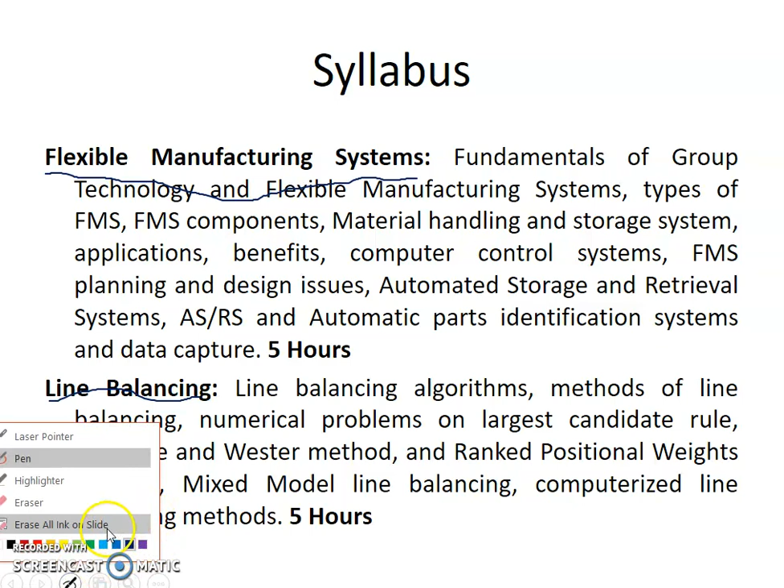So here, before going to understand what is flexible manufacturing system, we need to understand what is group technology. We can shortly call this as GT. Here we have a definition for group technology. Group technology or GT is a manufacturing technique in which parts having similarities in geometry, manufacturing process, and functions are manufactured in one location using a small number of machines or processes. That is called the group technology.

So here what this definition tells is that whatever the parts which are having similarities in design, manufacturing, geometry and functions, all these we are going to group into one group of parts which are similar, and we are going to manufacture in one location by using a small number of machines. That is called the group technology.

For example, if you go to any shop floor or manufacturing industry, we'll be having many number of machines, and the parts we are going to process by using different machines based on different processes. For example, you need to do a turning process, and again we need to do some drilling, milling. So like this, many processes will be done on the parts. So these parts we have to take to different locations where the machines are there in the shop floor, and we have to do the manufacturing processes.

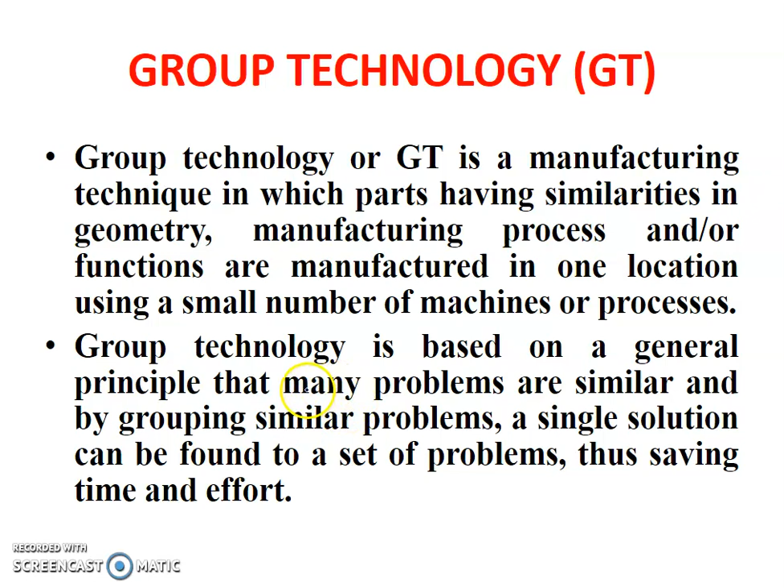So in continuation to group technology, the group of similar parts is known as part family, and the group of machinery used to process an individual part family is known as machine cell. So whatever parts we are going to group based on their similarities, that is design, manufacturing, geometry, or some functions, these parts we call a part family, and the machines which you are going to group in one location to do the processes required for the parts, that is known as the machine cell. It is not necessary for each part of a part family to be processed by every machine of the corresponding machine cell.

So this type of manufacturing in which a part family is produced by a machine cell is known as cellular manufacturing. Okay, so another name for this group technology manufacturing technique.

It's also called cellular manufacturing because we are going to group the parts which are similar in design and manufacturing process or material or geometry or functions, and we are going to manufacture these parts by using a small number of machines in a single location in the shop floor or manufacturing industry. That is also called the cellular manufacturing technique or cellular manufacturing.

The manufacturing efficiencies are generally increased. We can increase the manufacturing efficiency by employing this group technology because the required operations may be confined to only a small cell. Whatever operations are required to be done on the product are confined to a small number of machines, or the cell as we call it, thus avoiding the need for transportation of in-process parts.

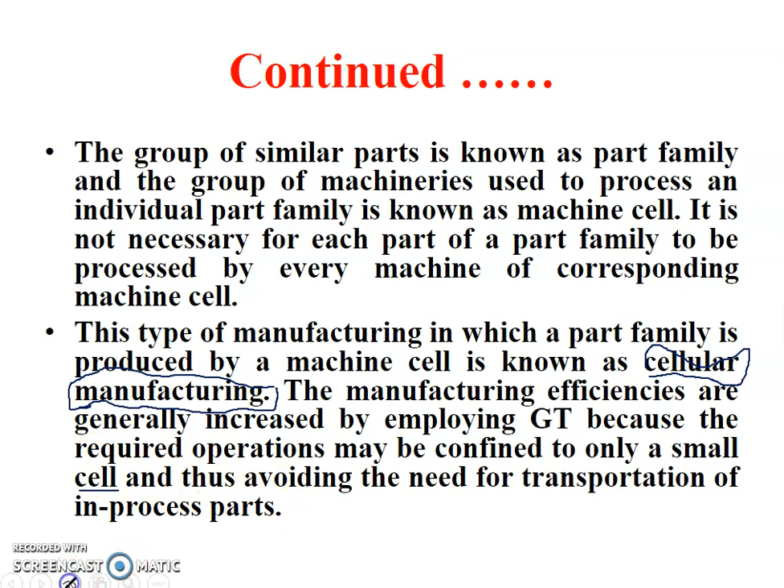It will avoid the transportation of the part from one machine to another machine roaming around the shop floor or the industry. So we'll go to the next slide. So here we have another definition for group technology. Group technology is a manufacturing philosophy in which similar parts are identified and grouped together to take advantage of their similarities in design and production.

So this is another standard definition from the book by Mikell P. Groover. What he is telling is that you are going to identify the similar processes and similar design, manufacturing or function, and we are going to do the manufacturing of these parts. We can observe in this diagram here. Here we have different parts, and almost all these parts require turning operation.

All the parts require turning operation, then they require drilling, then some require milling operation. Here you can observe it requires milling, and it requires turning also. So to do all these operations, we'll group the machines, that is the lathe, drilling, milling machines, in one single location, and we'll group the parts which require all these operations, and we can do the process in the same machines. So that is what group technology is telling. So we'll go to the next slide.

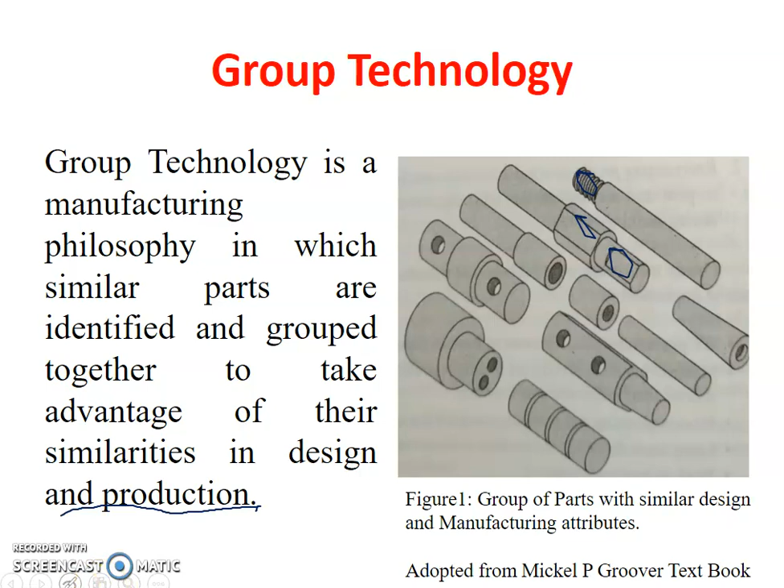So I told about part families. What we are going to do is identify the similar design, manufacturing, and processes or whatever the material functions in the parts or the products, and we are going to group them into different families based on the similarities. That is called the part family.

Part A, we are going to manufacture around 1 lakh pieces per year, and the tolerance required in the diameter of the part is plus or minus 0.010 inch. And what is the material used? Material is also different: 1015 CR steel, nickel plated. Part B, we are going to produce only 100 pieces per year, tolerance is plus or minus 0.001 inch, and material is also different, that is 18-8 stainless steel. So this we can observe. But here, what is similar?

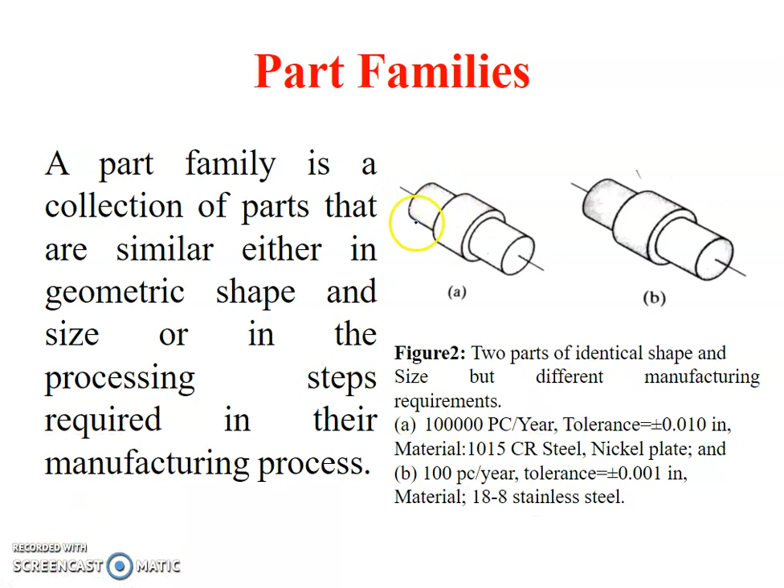The similarity is that these parts require turning operation, but the material is different and some manufacturing tolerance is also different. So like this we can group the parts into different part families based on these considerations.

So next we are going to classify the parts into different part families. In part classification and coding, similarities among parts are identified, and these similarities are related in a coding system. We have to classify the parts into different families and give some coding to those part families, and two categories of similarities can be identified. How can we identify the similarities in the parts? One is by using design attributes.

That is, we are going to classify the different parts into a group of parts, that is a part family, based on the geometry, whether they have similar or almost similar geometry, and size and material. That is one similarity by which we can identify the parts and group them into a part family.

The next one is the manufacturing attributes. That is the process steps required to make a part. What are all the different process steps? Turning, drilling, and some milling process. This is another similarity we can identify on the parts, and we can group them into part families. These are the two important things we have to consider while grouping the different products or parts into a single part family.

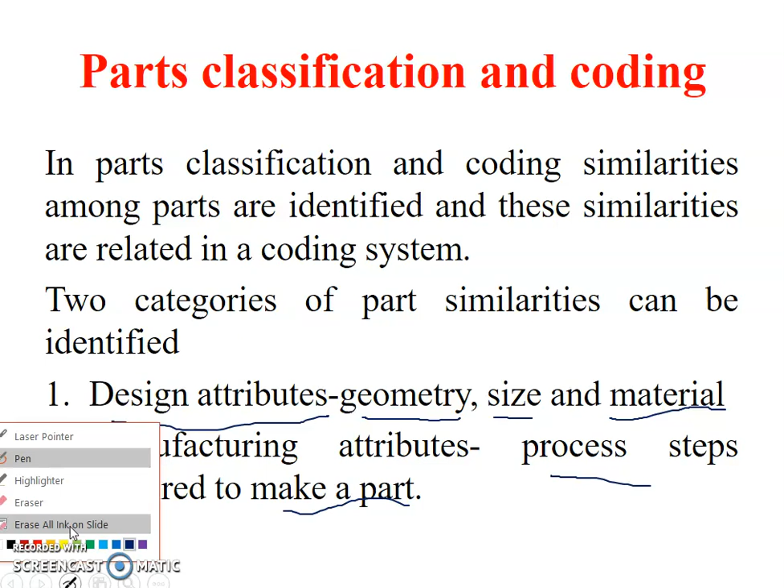So we'll move to the next slide. What are the benefits of group technology? If you use the group technology technique in manufacturing the parts or the product, what benefits will we get? The first benefit is standardization of tooling. The tools used in the manufacturing of those parts or products will be standard.

And a fixture is a holding device. We can also have standard holding devices. And standard setup also: before manufacturing we have to set the tool, set the workpiece, and set the machine. All these we can standardize in the manufacturing process.

Material handling is reduced because the distances within a machine cell are much shorter than within the entire factory. In a factory without group technology, we have to move the workpiece around the factory to do different operations, because the machines are in different locations. But in group technology, the machines are grouped into a machine cell, and we can do the manufacturing process in a single place on all the parts.

Process planning and production scheduling are also simplified. And setup times are reduced, resulting in lower manufacturing lead time. Manufacturing lead time is the total time required to produce one product from the beginning to the final finished product. By reducing the setup time, we can reduce the manufacturing lead time. That is another advantage of group technology.

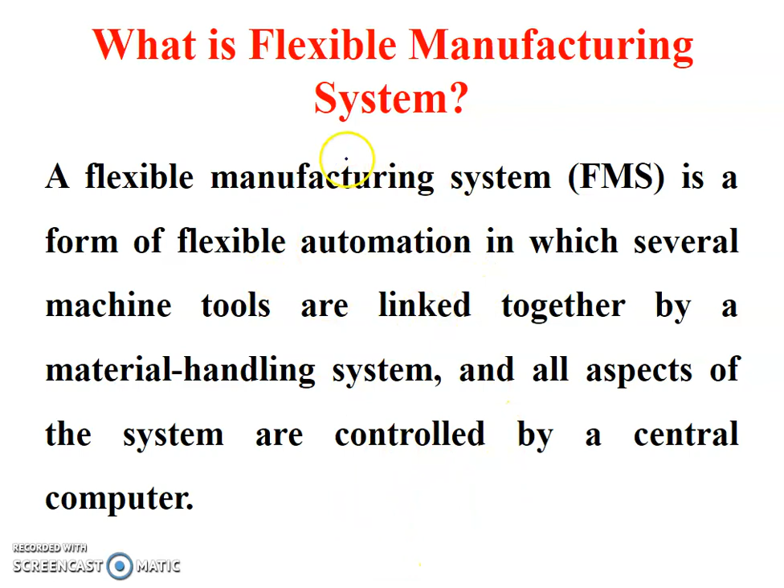Next we have flexible manufacturing, which we'll discuss in detail in the next lecture. Here we discussed what group technology is, what a part family is, how group technology works, and what the benefits are. We'll discuss the flexible manufacturing system in the next video.